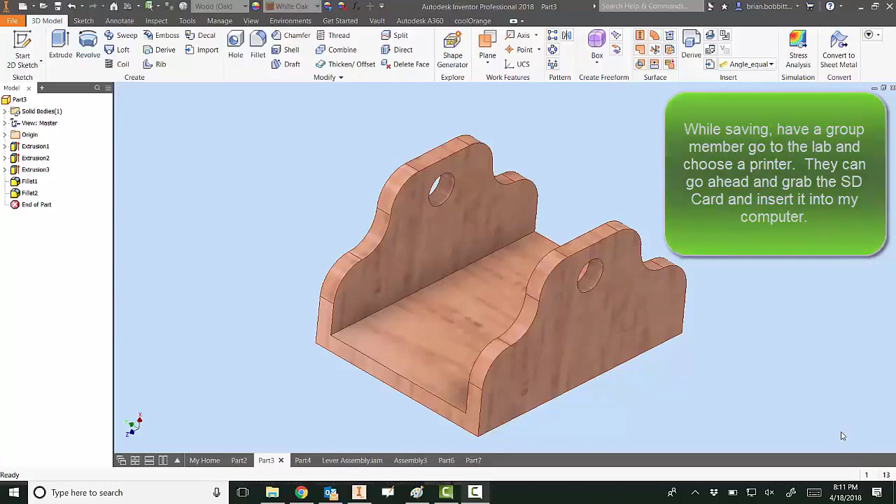Today I'm going to show you how to take a part from Inventor and get it ready for 3D print. So this is a fulcrum I've been working on for one of the first class levers, and what I'm going to do now is save it so that it's an STL file. So here's how we do that.

First we go up to File and we go down to Save As, but we don't click it. We actually click this arrow and go over to Save Copy As. Truthfully, it shouldn't make a difference. If you hover your mouse here, this menu should eventually pop up. So we click Save Copy As, and then we give it a file name.

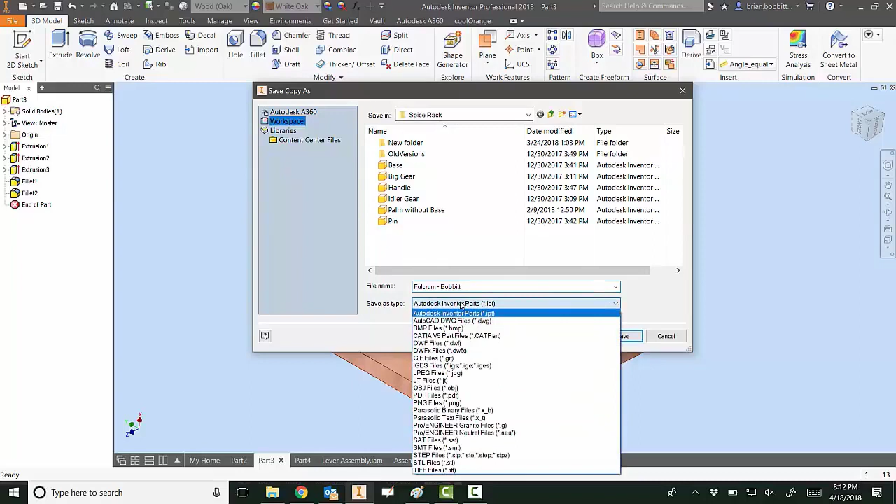So I'm going to call this Fulcrum, and it really does help if you put one member of the group in there for a title. Make sure you find the right folder for yourself. Down here where it says Save As Type, you're going to click in that box, and you're going to go down until you see STL files. You're going to click that.

Now here's a big key point. That's not enough yet. Inventor automatically saves things as metric. So we need to go to Options, and we need to make sure that this says inches and the resolution is set to high. What normally happens is right here it actually says centimeter by default. So we need to make sure that says inches.

Now, after we do this for the first time, we probably will not have to do that again because Inventor will remember it. However, we should get in the habit of checking that. So after we do this, we're going to click OK. And then we're going to save the file.

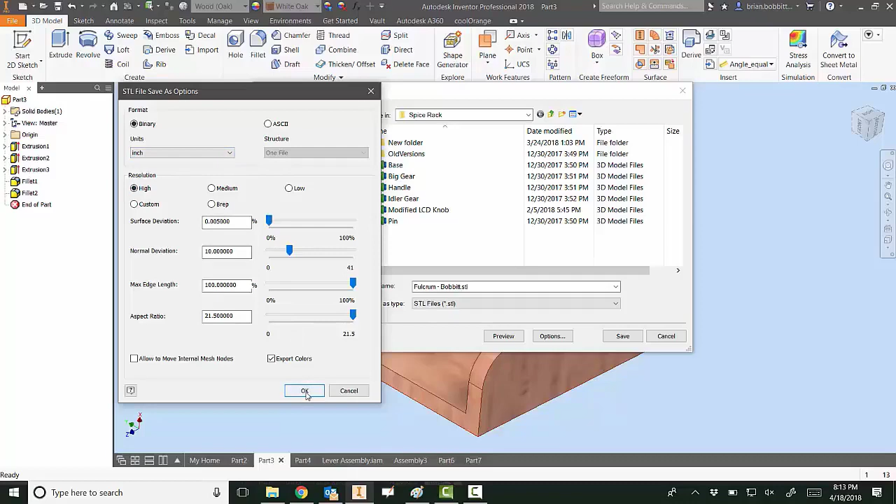And your next step is to just take out your email program, attach that STL to the email, and then send it to me. Now, the next thing we're going to do is we're going to actually go up to my computer, and you're going to find your email message. And here it is. Here's the file. So what I need to do is I need to double click that. And what will happen is it will open up the program.

You've got to really watch that double click because sometimes it'll try to preview it here. If it does that, just double click it again, and then it'll ask you if you want to open or save it. I'm going to go ahead and open it, of course.

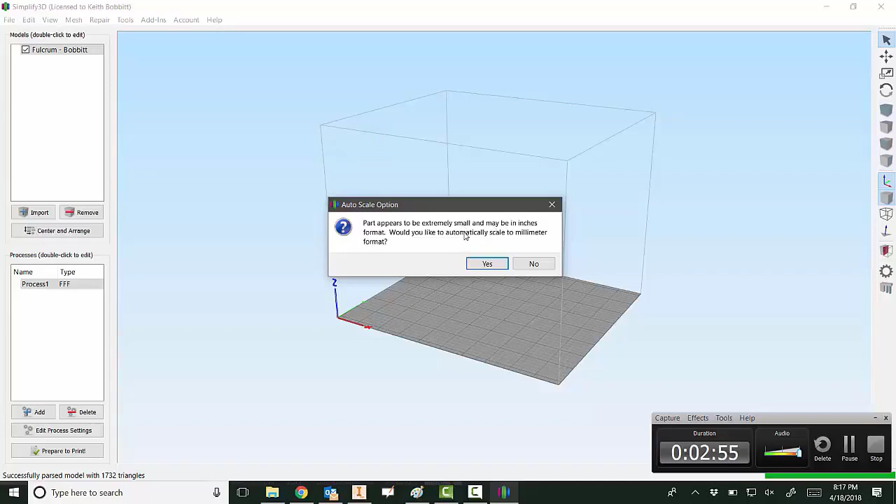The first question is a little bit tricky, but what it tells us is that we drew the part in inches, but because the 3D printing world is really in millimeters or the metric system in general, we need to convert this over. So the answer to this question we need to choose is yes. So I'll go ahead and click yes, and it imports the file.

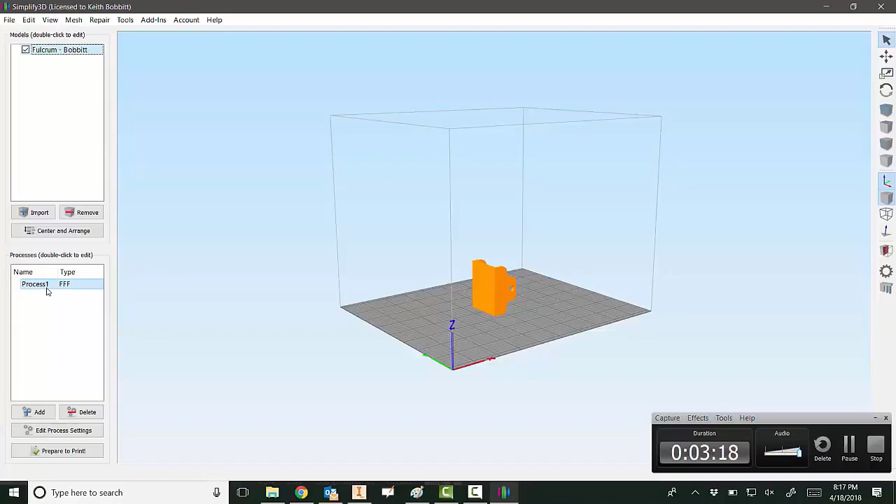Now by using my left mouse button, I can rotate this around any which way I want to get a better view. Now what I would do next is I would pick the right printer. To do that, I go down here to where it says Process 1, and I'm going to double click that. Right here where it says Profile, I need to click in that box and choose which printer it is that I'm going to use. Most likely you're going to use the Alpha Hatchbox, which is the big tall printer. It's the Delta printer in the back.

You might also use the one at the bottom that says North FlashForge Creator Pro, and it tells us it has PLA filament. You may also use this one, which is the same printer, just for a different filament. The other three you could use are these Wombot printers, and you can tell which one is which because it'll have the color around the LCD screen of the printer.

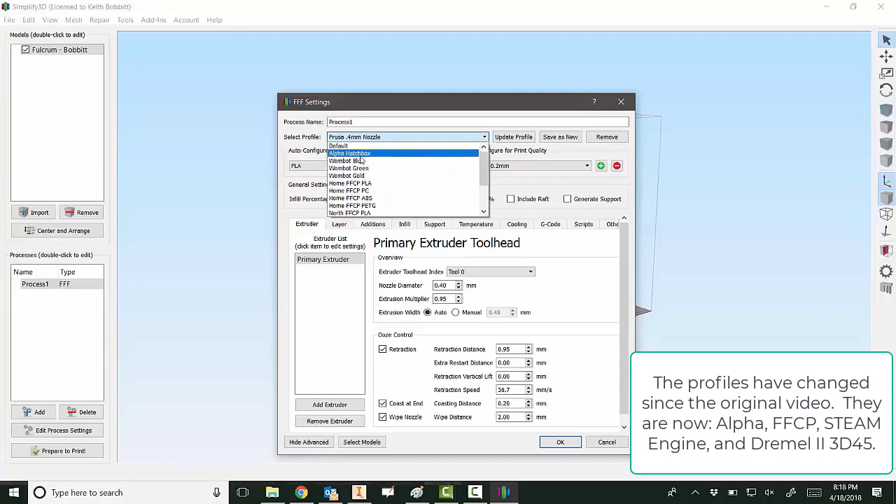In this case, I'm going to use the Alpha Hatchbox, so I click it, and then I really only have one other question, and that is, do I want to generate supports or not? So if I move this box out of the way, I can see that I can rotate that and print on this flat edge. So I don't really need to do any support. So I'm just going to click OK. So again, I've selected the printer, and I choose whether or not I'm going to generate support.

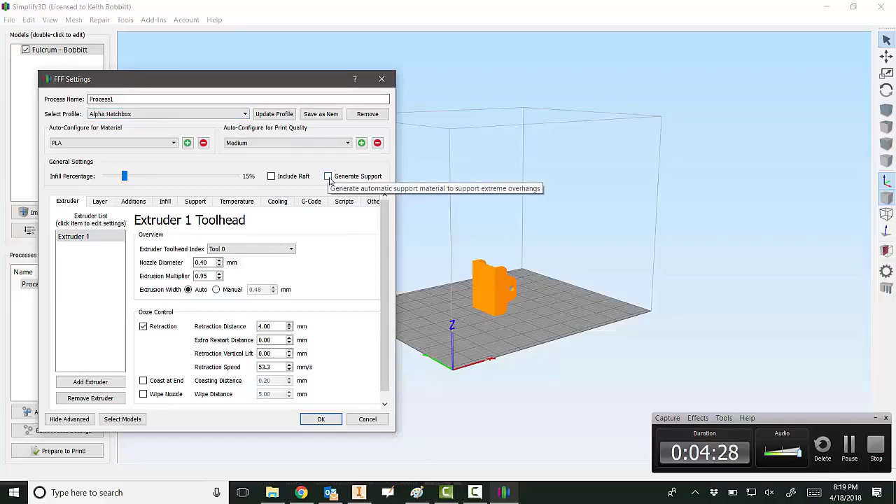Then I click OK. Now you'll notice because I changed printers, it relocated the part. That's not a big deal at all. In fact, if I just come over here right in the middle left of the screen and click Center and Arrange, it puts it right back in the middle.

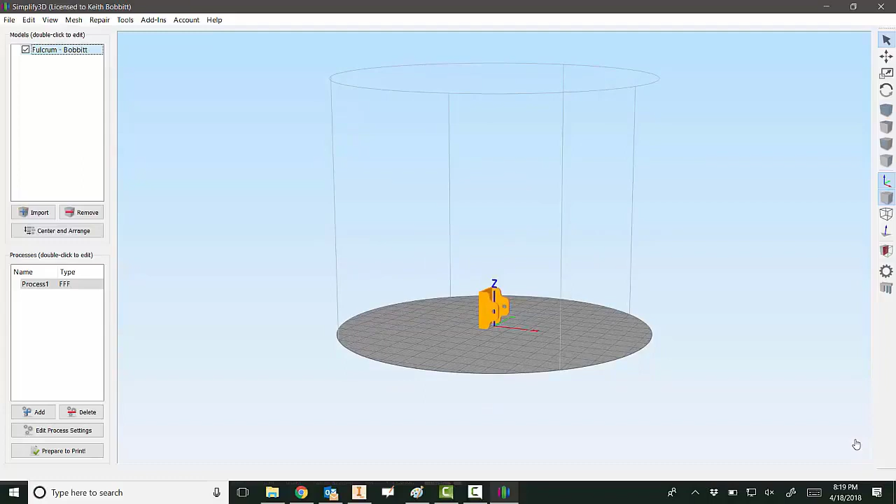Now the problem still, if I print it like this, I really do need supports. So what I'm going to do is actually rotate this. So I'm going to double click the part. And notice over here on the far right side of the screen, when I double click, there's going to be some changes happen over here. So I'll double click now. And now you can see I can offset it.

And what this does is allows us to move it left and right. I can also change the scaling. So I can make it really big, or I can make it back to normal. If I have a situation where I need one size to be bigger, so maybe I needed this to be a little taller, I could uncheck uniform scaling like that, and then choose which one I want to make taller. I'm going to just keep it uniform because the part is actually the way it's supposed to be.

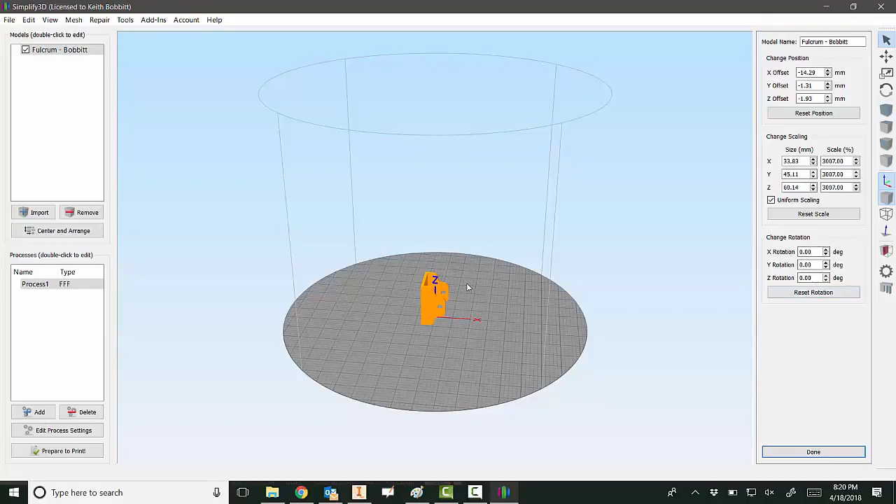Now down here at the bottom, you're going to use this the most. This is your rotation. Again, what I want to do is get on that flat edge. That's the one I want touching the bed surface, which is this gray area. So I'm kind of looking at axes here, and it looks like the y-axis is the one I want to rotate on. And it doesn't really matter. If you mess up, you just change it back to 0. Typically on this, we're using 90 degrees.

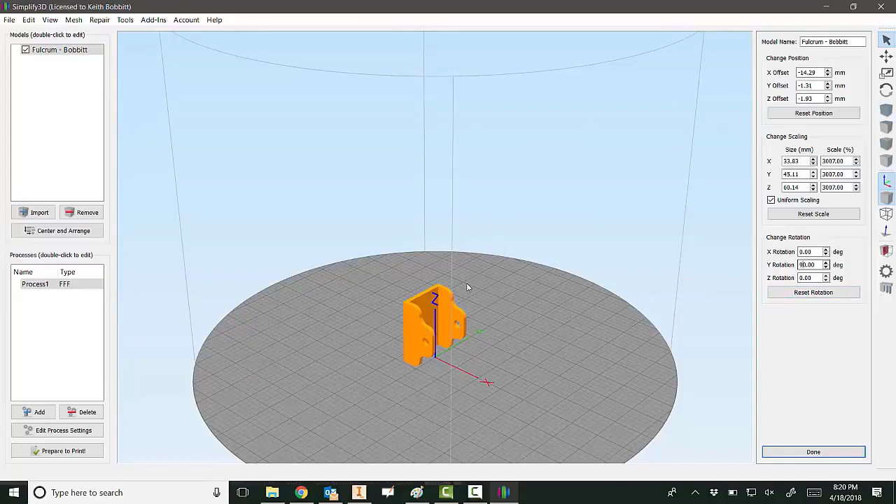So I'm going to go down here to Y, and I'm going to put a 90 in there and press the Enter key. Now notice it went through the bed, but it did rotate. To get it back on the bed, I'll just hit Center and Arrange. The part looks ready, so now I'm going to go down here to where it says Prepare to Print. When I do that, it'll put it on the print preview, and it'll tell me the build time, which is 49 minutes. Tells me the filament length, and it tells me what it will weigh. Also tells me material cost.

When I'm done with that, the next thing I want is come down here to where it says Save Toolpaths to Disk. So I'll click that. And really what I want to do is just save it. You can see my SD card is already in there. And that is something really I should do at the beginning of the process. I need to go back to the back room, find out which printer I want to use, and take the SD card from it and put it in the computer.

For file name, I want to be really careful here. Fulcrum is fine. Again, make sure to have at least one group member name in there. And then I'm going to type in 0H and 49M. And what that is, it tells me the estimated time. Once I do that, then I go ahead and hit save.

I put the time in there just because I may want to print it again, but may not need to go through all this. Maybe for some reason the part broke, or maybe I just want a duplicate of the part. So I don't really need to do all this again. I can just print the part straight from the printer. That's why I put the time on there, so I know about how long it's going to take. After that, I hit save.

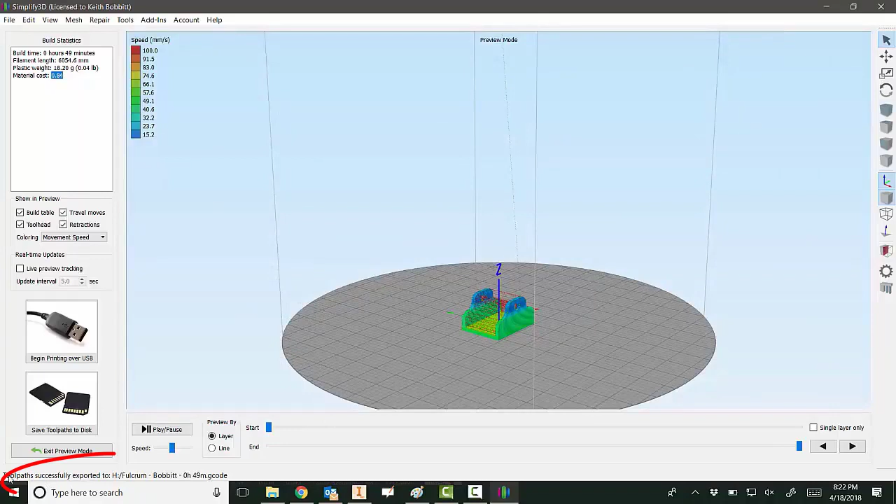And then from there, it says down here, Toolpath successfully exported, and depending on the part, it could take a couple of minutes to do it. This is a pretty small part, so it went through really, really fast. After I've saved it, I'm done with this program. So what I'll do next is I'll eject the disk from the computer, and I'll take it to the printer.